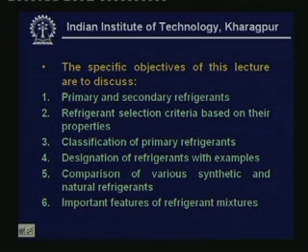Welcome back. In this lecture I shall discuss refrigerants. So, the specific objectives of this particular lecture are to discuss primary and secondary refrigerants, refrigerant selection criteria based on their properties, discuss classification of primary refrigerants, designation of refrigerants with examples, comparison of various synthetic and natural refrigerants, and finally some important features of refrigerant mixtures.

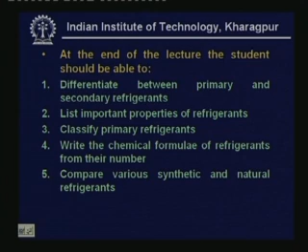At the end of the lecture you should be able to differentiate between primary and secondary refrigerants, list important properties of refrigerants, classify primary refrigerants, write the chemical formula of refrigerant from their number, compare various synthetic and natural refrigerants, and list salient features of refrigerant mixtures.

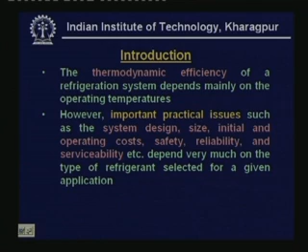So, let me give a brief introduction. We know that the thermodynamic efficiency of a refrigeration system depends mainly on the operating temperature, that means the heat source and sink temperatures. However, important practical issues such as the system design, size, initial and operating costs, safety, reliability and serviceability, etc. depend very much on the type of refrigerant selected for a given application. Hence, selection of a suitable refrigerant is a very important step in the design of any refrigeration system.

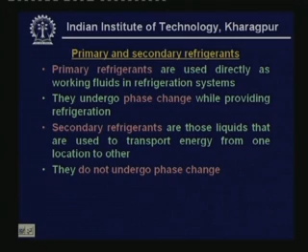Refrigerants can be broadly divided into primary and secondary refrigerants. Primary refrigerants are used directly as working fluids in refrigeration systems. They undergo phase change while providing refrigeration, that means while flowing through the evaporator vaporization takes place, and while flowing through the condenser these refrigerants condense. So they involve phase change processes, whereas secondary refrigerants are those liquids that are used to transport energy from one location to another. Unlike primary refrigerants, these secondary refrigerants do not undergo any phase change, and water and brines are the commonly used secondary refrigerants.

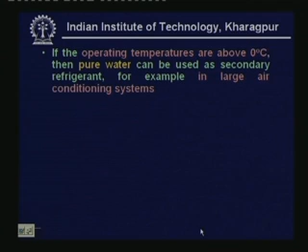If the operating temperatures are above 0 degree centigrade, then we can use pure water as secondary refrigerant. For example, pure water is widely used in large chilled water systems for air conditioning applications, etc. However, if the operating temperature is below 0 degree centigrade, that means for sub-zero temperatures, we cannot use water because water freezes at 0 degree centigrade. So, we have to use other secondary refrigerants, namely antifreezes or brines, and these kind of applications you encounter in cold storages or other frozen food processing applications, etc.

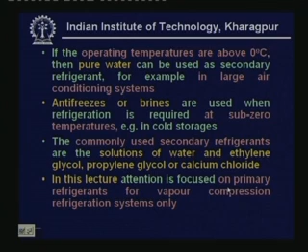The commonly used secondary refrigerants are the solutions of water and ethylene glycol, or the solution of water and propylene glycol, or the solution of water and salts such as calcium chloride, etc. In this lecture I shall not discuss secondary refrigerants, so the attention is primarily focused on primary refrigerants for vapor compression refrigeration systems only.

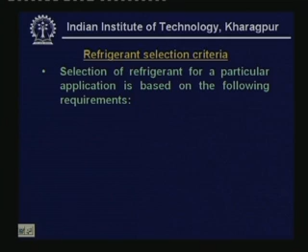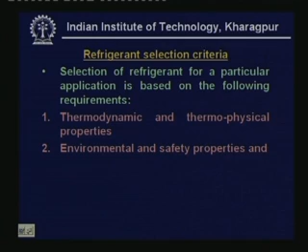Let us look at refrigerant selection criteria. Selection of refrigerant for a particular application is based on the following requirements. The first requirement is thermodynamic and thermophysical properties, second requirement is environmental and safety properties, and finally the third requirement is economics. So, first let us look at the first requirement, that is thermodynamic and thermophysical properties. The requirements are like this.

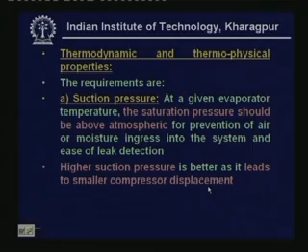First, the suction pressure. At a given evaporator temperature, the saturation pressure should be above atmospheric for prevention of air or moisture ingress into the system and ease of leak detection. This is an important requirement, and also a higher suction pressure is better as it leads to smaller compressor displacement. That means at a given evaporator temperature the refrigerant selected should have a positive pressure, that means the evaporator pressure should be above atmospheric. This is required because if any leakage takes place from the system to the surrounding, that means refrigerant leaks out from the system,

this is easier to handle than the reverse case, that means if the system is operating under vacuum, then air or moisture from outside leaks into the system. This is difficult to handle because in order to remove the air or moisture, you have to do a complete overhauling of the system. Also, if the system is operating under vacuum, then detection of leak is difficult. So as far as possible, the refrigerant should have a positive pressure at evaporator temperature.

Also, we know that when the suction pressure is high at a given temperature, then the density will be high or the specific volume will be low. That means for a given mass flow rate, the required size of the compressor will be small. For these reasons, the suction pressure should always be as high as possible. So this is the first requirement.

The second requirement, discharge pressure. At a given condenser temperature, the discharge pressure should be as small as possible to allow lightweight construction of compressor, condenser, etc. So, unlike suction pressure, at a given condenser temperature, discharge pressure should obviously be as low as possible. This is because once it is low, the maximum operating pressure of the system will be low, because that is decided by the condenser pressure.

Also, the pressure ratio will be small when the condenser pressure is small. So that is the third requirement. That means the pressure ratio, which is nothing but the ratio of the condenser pressure to the evaporator pressure, should be as small as possible for high volumetric efficiency and low power consumption. And the fourth requirement is that the latent heat of vaporization should be as large as possible, so that the required mass flow rate per unit cooling capacity will be small.

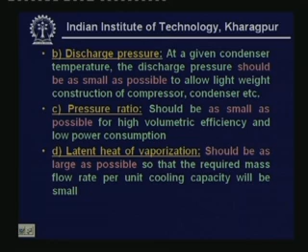However, we find that the above requirements are somewhat contradictory, because the operating pressures, temperatures and latent heat of vaporization are related by the Clausius-Clapeyron equation, and you know what the Clausius-Clapeyron equation is, given by this expression: ln P_sat = -h_fg/(RT) + s_fg/R, where h_fg is the latent heat of vaporization, s_fg is the entropy of vaporization, R is the gas constant and T is the absolute temperature.

Okay. So, using this equation, we find that the entropy of vaporization does not really change much. So, if you assume that it is constant, then you can show that the pressure ratio, that is the condenser pressure divided by the evaporator pressure, is equal to exp[(h_fg/R)(1/Te - 1/Tc)]. So, if the evaporator and condenser temperatures are fixed, let us say by the application and by the available heat sink, then you see that the pressure ratio increases as the latent heat of vaporization increases. That means, if you want a refrigerant with high latent heat of vaporization, the penalty you have to pay is a high compression ratio or high pressure ratio.

And high pressure ratio, as you know, leads to lower volumetric efficiency and lower volumetric capacity. On the other hand, if you want a very low pressure ratio, then the latent heat of vaporization will be low. That means the required mass flow rate for a given capacity of the refrigeration system will be high. That means you have to handle a large mass flow rate. This is again a disadvantage. This shows that a certain trade off is required between the pressure ratio and the latent heat of vaporization. In other words, a trade off is required between the COP and the volumetric capacity.

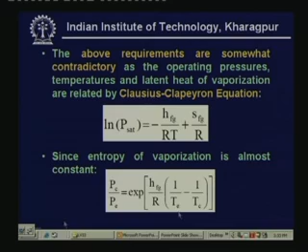Next comes the isentropic index of compression. The isentropic index of compression should be small, so that the compressor discharge temperature will be low. We know that the discharge temperature is linked to the isentropic index of compression by the formula, for example, T_discharge is given by T_suction times (Pc/Pe) raised to (gamma - 1)/gamma. This formula we have used while discussing compressors, etc. So, here gamma is the isentropic index of compression.

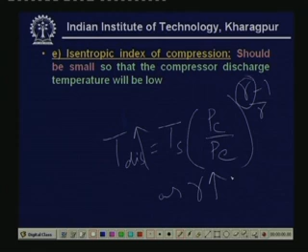So, you can see that for given compressor, condenser and evaporator pressures, and given suction temperature, the discharge temperature increases as your index of compression increases. So, this is not good from the compressor life point of view. So, in order to have a low discharge temperature, the value of gamma should be as small as possible.

So, the next requirement is that the liquid specific heat should be small, so the degree of subcooling will be large, leading to a smaller amount of flash gas at evaporator inlet. So, we need small liquid specific heat. Next, vapor specific heat. Vapor specific heat should be large, so that the degree of superheating will be small. We know that when the degree of superheating is large, the suction temperature will be high. Once the suction temperature is high, the density of the refrigerant at the entry to the compressor will be low. That means you require a larger compressor for a given mass flow rate. So this is not really good from a practical consideration.

So, as far as the vapor specific heat is concerned, we should have a high value of specific heat, but the liquid specific heat should be low. Again, we will find that this is contradictory. It is not possible to have a very high vapor specific heat and a low liquid specific heat. Next, liquid and vapor thermal conductivity. Both liquid and vapor thermal conductivity should be as high as possible for higher heat transfer coefficients.

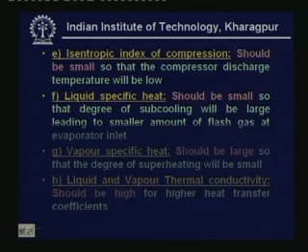Next requirement is liquid and vapor viscosity. The viscosity of both liquid and vapor should be as small as possible for smaller frictional pressure drops. So, we find that the thermodynamic properties are actually interrelated, and they are mainly dependent on the normal boiling point, critical temperature and the molecular structure. The normal boiling point indicates the useful temperature levels as it is directly related to the operating pressures. Okay, so, this is a very important property.

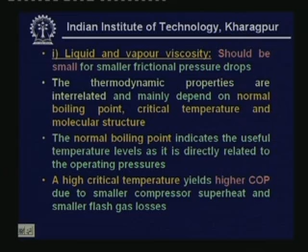Next comes critical temperature. So, what is the effect of critical temperature? If the critical temperature is very high, it yields higher COP due to smaller compressor superheat and smaller flash gas losses. Okay, so, this is the advantage of having high critical temperature. On the other hand, when the critical temperature is high, we find that the vapor pressure will be low. Once the vapor pressure is low, the volumetric capacity will be low. Okay, so, this is the disadvantage of having high critical temperature.

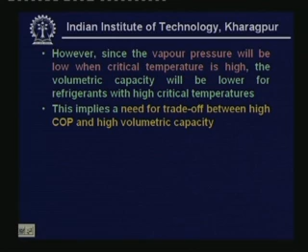So, you find that high critical temperature gives rise to higher COP, at the same time it gives rise to lower volumetric capacity. Okay. Again, you have to do a trade off between the volumetric capacity and the COP, and choose the critical temperature accordingly. This implies a need for a trade off between high COP and high volumetric capacity. And it is observed that for most of the refrigerants, the ratio of normal boiling point to critical temperature is in the range of 0.6 to 0.7. That means, this ratio is almost constant for most of the fluids.

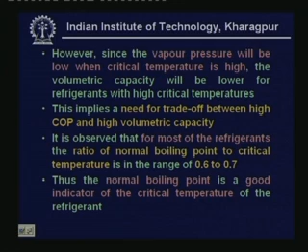Okay. This means that the normal boiling point is also a good indicator of the critical temperature of the refrigerant, and this ratio is in the temperatures are in Kelvin. Okay. Only then this ratio holds good. That means, you have to use absolute temperature scale. Okay. When you are using absolute temperature scale for the normal boiling point and critical temperature, you find that the ratio is about 0.6 to 0.7. Okay.

Now, properties such as latent heat of vaporization and specific heat depend on the molecular weight and structure of the molecule. And Trouton's rule shows that the latent heat of vaporization will be high for refrigerants having lower molecular weight. Okay. We have discussed Trouton's rule while discussing thermodynamics. Okay. So, according to Trouton's rule, if the molecular weight of the fluid is low, that means it gives rise to higher latent heat of vaporization. Okay. This is an advantage.

This is the reason why inorganic refrigerants, inorganic fluids such as water and ammonia, which have low molecular weight, always give rise to high latent heat of vaporization. On the other hand, synthetic refrigerants have high molecular weight, so their latent heat of vaporization is low. Okay. So, that is how the molecular weight and latent heat of vaporization are related. Now, the specific heat of refrigerant is related to the structure of the molecule, and a small value of vapor specific heat leads to dry compression, but higher degree of superheat.

Okay. That means, when you have a small specific heat for vapor, then you find that when you are starting the compression, if the inlet to the compression process is on the saturated line, then you find that the exit is always in the superheated region. That means compression will always be a dry compression process. Okay, so this is a requirement if you are talking about reciprocating compressors and many other compressors. Okay, so from this point of view, a low value of specific heat is good. Okay, but if the specific heat is low, we find that the degree of superheat will be high. Okay, this is not desirable.

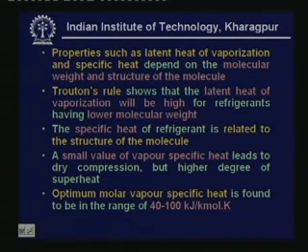Okay, so again you have to do some kind of a trade off, and again you find that there is an optimum value of vapor specific heat where the performance will be best. And it is also shown that the specific heat of vapor is related to the specific heat of the liquid. Okay, normally it is not possible to have, as I have already mentioned, a high value of specific heat for the vapor and a low value of specific heat for the liquid, or vice versa. Okay. And it is observed that the optimum molar vapor specific heat is found to be in the range of 40 to 100 kilojoule per kilomole Kelvin. Okay.

Next comes environmental and safety properties. Before I go to environmental and safety properties, there are also other thermodynamic properties which need to be considered. For example, one of the important properties, especially when we are dealing with very low temperature refrigeration, is the freezing point. Okay, the freezing point of the fluid should be lower than the lowest temperature that you encounter while operating the refrigerant system. Okay, this is required, otherwise the refrigerant may freeze while flowing through the system. Okay, so the freezing point should be as low as possible, right. Now let us look at the environmental and safety properties.

This is a major factor in deciding the usefulness of a particular refrigerant. Normally the efficiency of the system mainly depends upon the thermodynamic and thermophysical properties of the refrigerant, and we have discussed the requirements, right. But it is observed that finally whether the refrigerant can be used or not is decided not only by the thermodynamic and thermophysical properties, but mainly by the environmental and safety issues.

This is the reason why refrigerants such as carbon dioxide or ammonia or sulfur dioxide, which give reasonably good performance, were phased out or thought to be not good because they have certain safety related problems. Okay. So, especially the refrigerants used in the olden days, they were good as far as the performance is concerned, but most of them used to create some safety related problems. Okay, such as toxicity, etc.

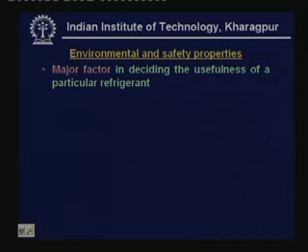That is the reason why they were phased out, and that is the reason why synthetic refrigerants were invented. Okay, so safety related properties are very, very important. Okay, now let us look at what are the environmental and safety related properties. These properties are, the first property is ozone depletion potential.

The ozone depletion potential, or the ODP, should be 0. Okay, and the ODP of a refrigerant or ODP of a fluid depends mainly on the number of chlorine or bromine atoms in the molecule. Okay, if the molecule contains chlorine or bromine atoms, then it will have a non-zero ODP value. Okay, and as per the Montreal Protocol, we have discussed this while discussing the history of refrigerants.

According to the Montreal Protocol, we cannot use any refrigerant which has non-zero ODP value. Okay, that means all ozone depleting substances have been phased out or have to be phased out. Okay, so in future the refrigerants should be non-ODS, that means non-ozone depleting substances. Okay. And the second important property is global warming potential or GWP. GWP should be as small as possible. That means refrigerants having high GWP are not recommended.

In fact, after the Montreal Protocol, several nations met at Kyoto, and under the Kyoto Protocol several refrigerants which have high GWP values have come under the substances to be regulated. Okay, because high global warming potential means you have the greenhouse effect, and we have discussed this issue also earlier. So, global warming is an environmental issue on a global scale. So, it is not recommended to use refrigerants having high GWP values. Okay. Even though there is no final decision as yet on the use of refrigerants having high GWP values, we really do not know, but in future they may be phased out.

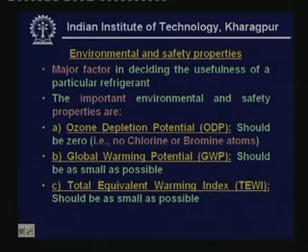Okay. Next is what is known as the total equivalent warming index, or TEWI. Okay, TEWI. This is a new index, and this index takes into account the direct as well as the indirect contributions of a refrigerant to global warming. Okay, so global warming potential considers only the direct contribution of a refrigerant to global warming. What is the direct contribution of refrigerant? When the refrigerant leaks out into the atmosphere, that means when you release the refrigerant into the atmosphere, what is its contribution to global warming? Okay, this is considered while estimating the global warming potential.

Okay, but the refrigerant can also contribute indirectly to global warming. And what is this indirect contribution? This indirect contribution depends upon its energy consumption. Okay, if a system using a particular refrigerant consumes a higher amount of energy compared to another refrigerant, then this particular refrigerant contributes to global warming indirectly, because higher energy consumption means higher burning of coal, etc. Okay, so this is the indirect contribution of a refrigerant. So these direct as well as indirect contributions of refrigerant have been taken into a single index, and this index is called the total equivalent warming index, TEWI. Obviously, the total equivalent warming index should be as small as possible for refrigerants. Okay.

Next comes the toxicity. Obviously, refrigerant should preferably be non-toxic. Toxicity means this is related to the hazardous nature of the refrigerant as far as human beings are concerned. Okay, if a refrigerant is toxic, then if a person is exposed to such refrigerant, he will be suffocated. Okay, so obviously refrigerant should not be toxic, right?

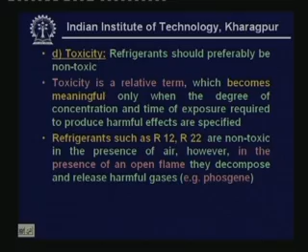However, in the presence of an open flame, they decompose and release harmful gases such as phosgene. This is again an important issue. So if you release R12 or R22 into the atmosphere, and there are no open flames or heating elements, then there is no problem, provided of course its concentration is not too high. But if there is an open flame, then the R12 decomposes in the presence of open flame and air, and it releases very dangerous, poisonous gases such as phosgene. If the human being is exposed to such conditions, then he will get affected drastically.

So ultimately the toxicity depends on many other issues: the concentration, the time of exposure and the conditions. And normally whether a particular refrigerant poses the problem of toxicity or not depends upon the amount of refrigerant that you are using in what space. If you are using a small amount of refrigerant in a large space, then even when all the refrigerant is released into the space, the concentration will be small, so it will not give rise to any serious problem. On the other hand, if you are releasing a large amount of refrigerant into a small volume or small space, then obviously the danger will be greater.

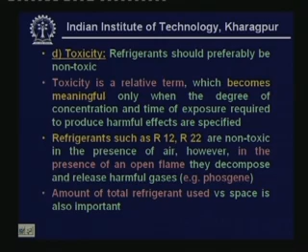So as I said, the amount of total refrigerant used versus space is also important. Next comes flammability. Obviously the refrigerant should preferably be non-flammable, and it should also be non-explosive. But we find that sometimes we cannot avoid using flammable refrigerants. In such cases special precautions should be taken to avoid accidents. That means the design has to be different if you are using a flammable refrigerant. You have to make sure that there are no ignition sources, and you also have to take higher precautions to prevent leakage of the refrigerant. Basically the way you handle a flammable refrigerant will be different from the way you handle a non-flammable refrigerant.

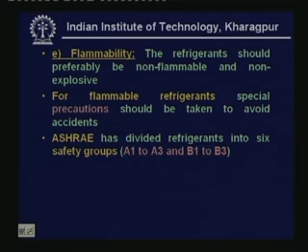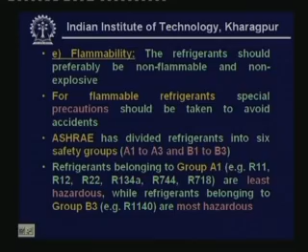And ASHRAE, the American Society of Heating, Refrigerating and Air Conditioning Engineers, has divided the refrigerants into 6 safety groups: A1, A2, A3 and B1, B2, B3. Refrigerants belonging to group A1, for example R11, R12, R22, R134a, R744, R718, are least hazardous, while refrigerants belonging to group B3, for example R1140, are most hazardous. So if you know to which group a particular refrigerant belongs, then you know whether it is really dangerous or hazardous or not. These are the advantages of knowing to which group a particular refrigerant belongs.

Other important properties are chemical stability. As far as possible, the refrigerant used should be chemically stable as long as it is within the system. Once it is released into the atmosphere, even if it breaks down, that is not a problem. In fact, in the aftermath of ozone layer depletion, it is observed that if it breaks down when released into the atmosphere, it is good, because the refrigerant will not go to the stratosphere. But as long as the refrigerant is within the system, it should not break down under any circumstances, even when it is exposed to higher temperatures, for example in the compressor. That means it should be chemically stable.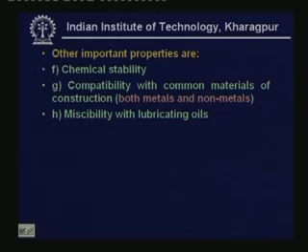The second requirement is compatibility with common materials of construction. The common materials of construction are both metals as well as non-metals. This is a very important practical requirement. The refrigerant that you use should be compatible with almost all materials of construction, such as materials used for constructing the heat exchangers, various seals used in the system, various plastics used in the system, etc. It should not react with any of these materials. And next, miscibility with lubricating oils. Miscibility with lubricating oils is a very complex issue, because it is not necessary that the refrigerant should be completely miscible with a lubricating oil.

Okay, if a refrigerant is not at all miscible with lubricating oil, for example ammonia is not at all miscible with lubricating oil, then all that we have to do is install an oil separator at the exit of the compressor, so that you can collect the oil from the refrigerant vapor and send it back to the compressor. Okay, so that the oil does not circulate through the system, right.

On the other hand, if you have a refrigerant such as R12, which is completely miscible with the oil, then also there is no problem, because since oil is miscible with the refrigerant, oil will circulate along with the refrigerant, and if you take care of the design of the evaporator tubes, etc., then oil will come back to the compressor. Okay, so in principle there is no problem with refrigerants which are completely miscible and which are not completely miscible. Okay, but the problem comes with refrigerants which are partly miscible.

Okay, with partly miscible refrigerants such as R22, you have to take extra care to make sure that the lubricating oil is coming back to the compressor. Okay, so you must know the relationship between the lubricating oil and the refrigerant. Okay, so this has a bearing on the design of the system.

Then dielectric strength. Dielectric strength is very important in systems using hermetic compressors. We know that in hermetic compressors, the refrigerant comes in contact with the electrical winding of the motor. Okay, so the dielectric strength of the refrigerant should be high, so that it will not break down. Okay, this is not very important when you are talking about open type of compressors.

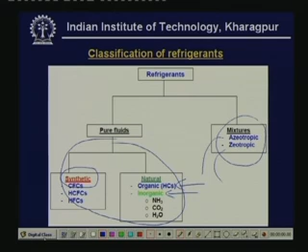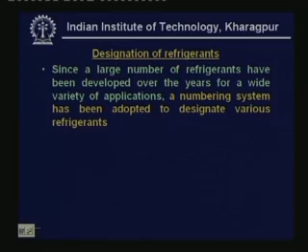Now, let us look at designation of refrigerants. Since a large number of refrigerants have been developed over the years for a wide variety of applications, a numbering system has been adopted to designate various refrigerants. There are in fact hundreds of refrigerants which are used in a wide variety of applications. So, it is very difficult to identify or designate them by their chemical composition. As a result, people have devised a numbering system.

So, if you know the number of the refrigerant, then you can get some very useful information regarding the refrigerant. From the number one can get information about the type of refrigerant, its chemical composition, molecular weight, etc. All the refrigerants are designated by R followed by a unique number.

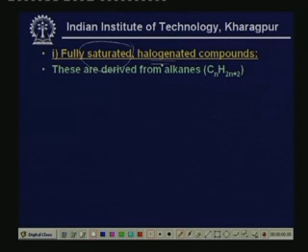So, first let us look at fully saturated halogenated compounds. These are derived from alkanes. The alkanes, as you know, have general formula CnH2n+2, and examples of alkanes are methane, ethane, propane, etc. What do we mean by halogenated? Here the hydrogen atoms are partly or fully replaced by other atoms, for example, atoms of chlorine, fluorine, bromine, etc. And always, the total number of atoms in the molecule will be equal to 2n+2. So, these are fully saturated halogenated compounds.

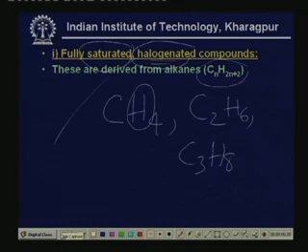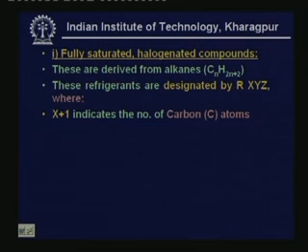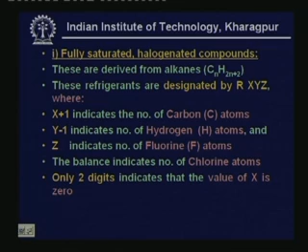These refrigerants are designated by R, X, Y, Z, where X, Y, Z are numbers. X plus 1 indicates the number of carbon atoms, Y minus 1 indicates the number of hydrogen atoms, and Z indicates the number of fluorine atoms, and the balance indicates the number of chlorine atoms. If there are only 2 digits, that means the value of X is 0. If you have only R12, that means X is equal to 0. Let me give an example.

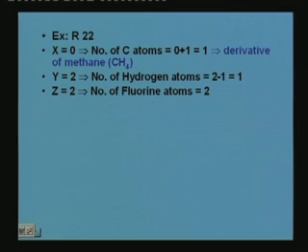Let us say that the number is R22. There are only 2 numbers, that means X is equal to 0. X is 0 means the number of carbon atoms is 0 plus 1, that is equal to 1. Number of carbon atoms is 1 means this refrigerant is a derivative of methane, CH4. Next, Y is equal to 2, that means number of hydrogen atoms is 2 minus 1, that is 1. Next, Z is equal to 2. Since there are only 2 numbers, this is R022, and the 0 is omitted, so we simply show it as R22. So, X is 0, Y is 2 and Z is 2.

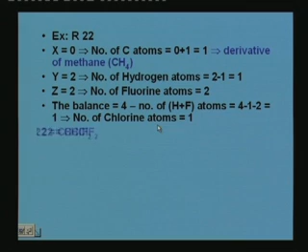From the general formula, Y is 2 means number of hydrogen atoms is 2 minus 1, that is 1, and Z is 2 means number of fluorine atoms is equal to 2. And the balance, what is the balance? There should be 4 bonds in total, so the balance is 4 minus the number of hydrogen atoms plus fluorine atoms. Here the number of hydrogen atoms is 1 and fluorine atoms is 2, so the balance is 4 minus 1 minus 2, that is 1. So, the number of chlorine atoms is 1. That means R22 has 1 carbon atom, 1 hydrogen atom, 2 fluorine atoms and 1 chlorine atom. Its chemical formula is CHClF2. Once you know the basic rule, just by looking at the number you can get its chemical composition. This is the advantage of devising this kind of number system.

Using the same rule you can show that the formula of, for example, R12 is CCl2F2, that means it is a chlorofluorocarbon, and the chemical composition of R134A is C2H2F4. This is the derivative of ethane because you have two atoms of carbon. In R134A, the letter A stands for an isomer. That means you can have a refrigerant R134 and a refrigerant R134A. Both have the same chemical composition, but different atomic arrangement. So, the molecular weight and chemical composition will be the same, but the atomic arrangement will be different, and such molecules are called isomers. Because of the different molecular arrangement they give slightly different properties.

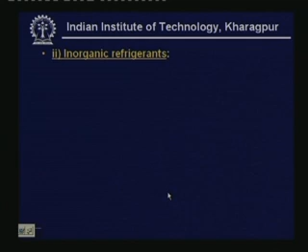Next comes your inorganic refrigerants. These are designated by number 7 followed by the molecular weight of the refrigerant. The molecular weight is rounded off. For example, ammonia has a molecular weight of 17, so its number is R717. The 7 shows that it is an inorganic refrigerant.

Similarly, carbon dioxide, CO2, its molecular weight is 44, so its number is R744. Water, molecular weight is 18, so its number is R718. So, that means the last 2 digits show its molecular weight. Air has a molecular weight of 29, so its number is R729. Similarly, sulfur dioxide, for example, its molecular weight is 64, so its number is R764.

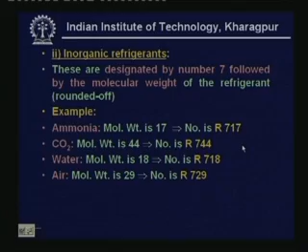Next, the third category is mixtures. All azeotropic mixtures come under the 500 series, that means R500, R501, R502, etc. So, the 5 or 500 series means that it is a mixture and it is an azeotropic mixture. All zeotropic mixtures have been given the 400 series. That means R404, 407, 410, etc.

Let me give an example, azeotropic mixture R500. This is a mixture of R12 and R152A. Of course, looking at the number 500, you cannot say it is a mixture of what, but all that you can say is that it is an azeotropic mixture because it starts with 5. You cannot say its composition or its weight percent or anything. Similarly, R502 is a mixture of R22 and R115. Here this is weight percent. For example, in R502, R22 has 48.8% by weight, R115 is 51.2% by weight.

Next comes zeotropic mixtures, for example R404A. Again the digit 4, that means the 400 series, means that it is a zeotropic mixture. It is a mixture of R125, R143A and R134A. Here the letter A, the capital letter A, does not mean that it is an isomer. So, to distinguish between isomers and the others, small letters a, b, etc. indicate isomers, whereas capital letter A means it is a mixture. Then again you can have R407A, it is a mixture of R32, R125 and R134A.

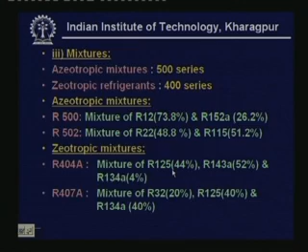So, the last category is hydrocarbons. Saturated hydrocarbons, for example propane. Propane, as you know, has the chemical formula C3H8. So, you can apply the same rule that we have applied for fully halogenated hydrocarbons, and you can show that its number is R290. Because here the number of carbon atoms is 3. So, you have this 2 here because X is 2, right.

X is 2 means the number of carbon atoms is 2 plus 1, that is 3. And Y is 9 here, that means the number of hydrogen atoms is 9 minus 1, that is 8. Here Z is 0, that means it does not contain any fluorine atoms. So, since it is balanced, you do not have any chlorine atoms also. So, propane follows the rule given earlier, but

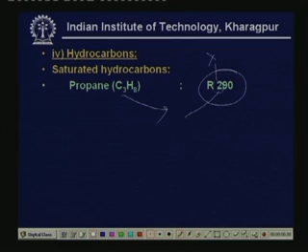the problem comes when you have to give a number for n-butane, for example. N-butane has the chemical formula C4H10. So, you cannot apply the earlier rule, because if you apply it, you find that the number of hydrogen atoms is 10. So, the Y value will be 11. Y value 11 means it has 2 digits. So, that leads to confusion. So, as a result, n-butane has been given an arbitrary number, that is R600.

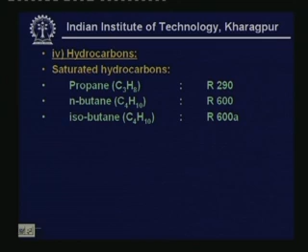Similarly, you have isobutane. Isobutane is also an isomer of butane, and its chemical composition is the same as n-butane, that is, it is C4H10, and it is given the number R600A. Again here the letter A means that it is an isomer.

You can also have unsaturated hydrocarbons, for example R1150. Here it is 4 digits, unlike the other refrigerants. 4 digits indicates that it is an unsaturated hydrocarbon. So, the first digit 1 means that it is an unsaturated hydrocarbon, and for the other digits you can again apply the rule and get the chemical composition. For example, the second digit 1 means that the number of carbon atoms is 2, the third digit 5 means that the number of hydrogen atoms is 4. The fourth digit 0 means that the number of fluorine atoms is 0. Similarly, R1270. This is C3H6, that is, it is propylene.

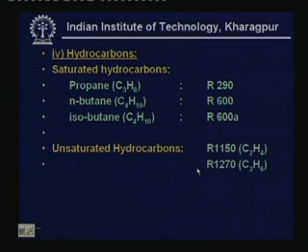So, that is how the numbering system is being used. You have to keep this in mind, so that once you know the number, you can immediately identify the refrigerant. Whenever we talk about refrigerants, normally we designate them in terms of numbers only, because the chemical formulas or chemical names are very long, and always mentioning them in terms of chemical names can be confusing. Next, let us look at the comparison between different refrigerants.

Synthetic refrigerants that were commonly used for refrigeration, cold storage and air conditioning applications are R11, a CFC, chlorofluorocarbon 11; R12, that means CFC12; R22, an HCFC, hydrochlorofluorocarbon 22; and R502, an azeotropic mixture of HCFC22 and CFC115. I am sorry, there is a mistake earlier; R502 is a mixture of HCFC22 and CFC115. These were used very widely, but had to be phased out due to their ozone depleting potential. That means all these refrigerants have non-zero ODP values. So, due to the Montreal protocol, all these refrigerants were already phased out or have to be phased out.

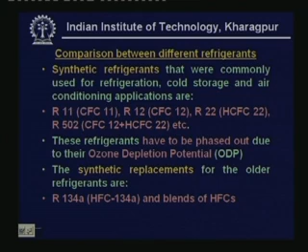The synthetic replacements for the older refrigerants include R134a. This is an HFC, a hydrofluorocarbon, and it does not contain chlorine. So, its ODP value is 0, so it can be used. This is one of the synthetic replacements for the older refrigerants. In addition to that, various blends of hydrofluorocarbons are also being used as synthetic replacements. Generally, synthetic refrigerants are non-toxic, non-flammable and are compatible with various materials of construction. So, these are the main advantages of synthetic refrigerants.

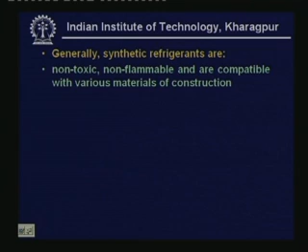However, compared to the natural refrigerants, these synthetic refrigerants offer lower performance and they also have higher global warming potential. Normally, you find that their COP values are much lower than the natural refrigerants, which means efficiencies are lower. Also, the thermophysical properties are not as good as those of natural refrigerants, and in addition they possess high global warming potential. As a result, all the synthetic refrigerants face an uncertain future. Even though right now there is no ban on them, we really do not know. In future they may be banned or phased out.

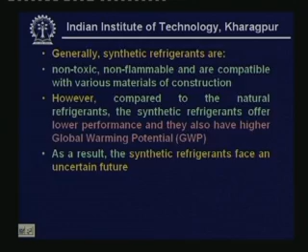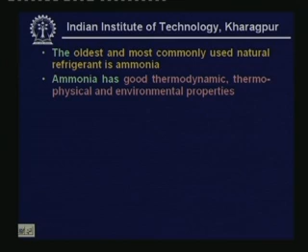The oldest and most commonly used natural refrigerant is ammonia. It is more than 100 years old and it is still being used very widely. Ammonia has excellent thermodynamic, thermophysical and environmental properties. It is inexpensive and easily available. However, it is toxic and it is not compatible with some of the common materials of construction such as copper or brass. So, these are the disadvantages of ammonia: toxicity and incompatibility with common materials. It can also be flammable under certain conditions.

Other natural refrigerants that are being suggested are hydrocarbons and carbon dioxide. Hydrocarbons and carbon dioxide were used in the olden days. If you remember our lecture on the history of refrigerants, these were very widely used in the early days of refrigeration. But later they were phased out because of some perceived problems such as flammability and low critical temperature. But they have made a strong comeback because of their excellent thermodynamic and thermophysical properties and mainly because of their environmental friendliness. So, in spite of some practical problems, these refrigerants are being considered as they are environmentally safe, inexpensive and offer good performance.

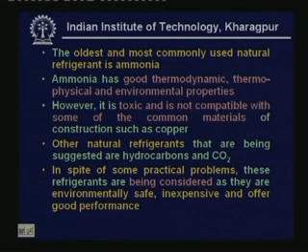Now, let me show some commonly used refrigerants and their salient features and properties. First refrigerant is R11. R11 is a chlorofluorocarbon, so it is a CFC. It has a normal boiling point of 23.7 degrees centigrade. Since its normal boiling point is quite high, its operating pressures will be low. That means, if you want to use it for air conditioning applications, say at 7 degrees evaporator temperature, the evaporator will be operating under vacuum condition, that means the pressure will be subatmospheric. So, this is a disadvantage of R11.

And the specific volume of the refrigerant will be very high because the pressures are low. So, these are two disadvantages of this particular refrigerant. However, since it has other advantages, this is still used and it is mainly used along with centrifugal compressors, because of its high specific volume. Its latent heat of vaporization at normal boiling point is 182.5 kilojoule per kg. Its critical temperature is almost 198 degrees centigrade, which is good, and its isentropic index of compression is 1.13. And its ODP is 1 and its GWP is 3500.

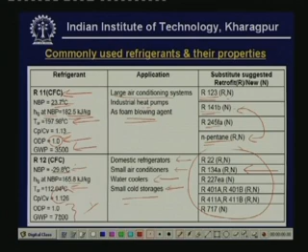Next is R22. This is a hydrochlorofluorocarbon. This is another very widely used refrigerant, and it has a normal boiling point of minus 40.8 degree centigrade, and it also has a reasonably high latent heat of vaporization of 233.2 kilojoule per kg, but it has a lower critical temperature of 96 degree centigrade compared to R12, and its Cp by Cv value is also relatively higher. So that means its discharge temperatures will be high, and its ODP value is non-zero, but it is quite low. Okay, so it has an ODP value of 0.05.

So it is also a substance which has to be phased out, but unlike R12 and R11, some time is allowed for phasing out. Okay, so you can use it till almost 2030. Okay, so you can still use it. It also has a global warming potential, and it is mainly used in air conditioning systems and cold storages. Okay. And since it also has got to be phased out, some substitutes have to be found. Okay. Again, these are the major substitutes.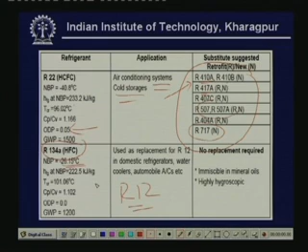This is a hydrofluorocarbon. Its properties are almost closest to R12. Okay. It has a normal boiling point of minus 26.15 degree centigrade. Its latent heat of vaporization is good. Critical temperature, etc., are also shown here, and it is used mainly as a replacement for R12 in domestic refrigerators, water coolers, automobile air conditioning systems, etc. Okay. No replacement is required as yet because its ODP value is 0. Okay. There are some problems with this. The problems are it is immiscible with mineral oils, so you cannot use mineral oils as lubricants, so you have to go for synthetic lubricating oils, and it is also highly hygroscopic.

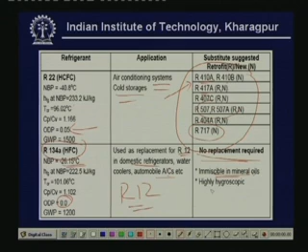Next comes refrigerant ammonia R717, and its normal boiling point is almost minus 33 degree centigrade. It has a very high latent heat of vaporization at normal boiling point because of its low molecular weight. Okay. Its critical temperature is also quite high. Its Cp by Cv value is high, which is a disadvantage. So you have to use water cooled compressors to keep the compressor temperature low. Okay. It is excellent as far as its environment friendliness is concerned because its ODP is 0, GWP is also 0. So its major applications are in cold storages, ice plants, in food processing, and in frozen food cabinets, etc. Okay. You do not require any replacements for this. Some problems are it is toxic and flammable, and it is incompatible with copper and brass. Advantages are it is highly efficient and it is inexpensive and widely available.

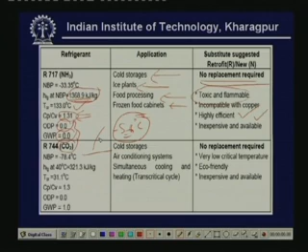Next comes R744, this is carbon dioxide. It has a very low normal boiling point of minus 78.4 degree centigrade, but still its freezing point is about minus 56 degree centigrade. So you cannot use it for temperatures below minus 56 degree centigrade because of its freezing point. Okay. And it also has good latent heat of vaporization.

Major problem with this is its critical temperature is very low. That is the reason why it was phased out, but alternate cycles have been devised, that is the transcritical cycle, where the condensation process is replaced by a gas cooling process, and this has made a strong comeback because of the modification in the cycle.

Other important properties: it has a low ODP, it has zero ODP, I am sorry, and it has very low GWP. Its major applications are in cold storages, in air conditioning systems, and in simultaneous cooling and heating if you are using a transcritical cycle. You do not require any replacement, and the major disadvantage is low critical temperature and high operating pressures. I did not mention this, but its operating pressures are very high, and it is eco-friendly, inexpensive and easily available.

Next is water, that is R718. Major problem with water is its high normal boiling point of 100 degree centigrade. That means your operating pressures will be under high vacuum. Since it has a low molecular weight, its latent heat of vaporization is very high. It's excellent from this angle. Its critical temperature is also very high. It's very good. The problem, of course, is the Cp by Cv value is high.

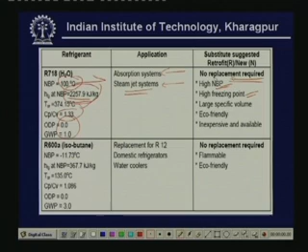It is perfectly environmentally friendly because its ODP is 0 and GWP is very low, and its major applications are as refrigerant in absorption systems and as refrigerant in steam jet systems. Its features are you do not require any replacement because of its excellent environmental properties. Disadvantages are high normal boiling point and high freezing point, so you cannot use it for sub-zero temperatures. Large specific volume, so you cannot use reciprocating compressors because of this. Large specific volume is because you are operating the system at very low pressures. So, its main advantages are eco-friendliness, inexpensive, and availability.

Next is R600A, this is isobutane, a hydrocarbon. Its normal boiling point is minus 11.73 degree centigrade, its latent heat of vaporization is reasonably high, its critical temperature is very high, and the Cp by Cv value is low, which is good. Its ODP is 0, so it is perfectly safe as far as ozone layer depletion is concerned. GWP is also very low.

This is used as a replacement for R12 in new systems. You have to change the compressor in domestic refrigerators, water coolers, etc. Its features are you do not require any replacements. Its main concern is that it is highly flammable, and its main advantage is that it is eco-friendly.

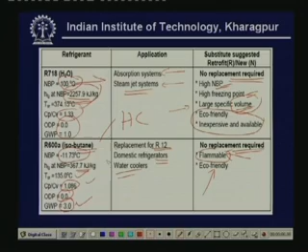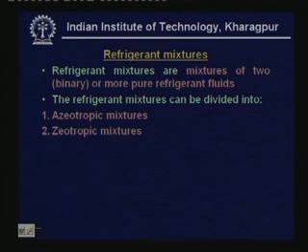So, this table is not actually comprehensive because there are many other refrigerants with many other features and many other problems also. Now, let us briefly look at refrigerant mixtures. Refrigerant mixtures are mixtures of 2 or more pure refrigerant fluids. The refrigerant mixtures can be divided into, as I said, azeotropic mixtures and zeotropic mixtures. The azeotropic mixtures are usually binary mixtures that behave like a pure fluid. For all practical purposes they behave like a pure fluid. The example is R502, which is a mixture of R22 and R115.

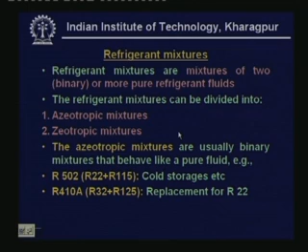This was mainly used in cold storages, etc., but this is banned because of R115, which is an ozone depleting substance. Then you also have R410A. This is R32 plus R125. Even though I am calling it an azeotropic mixture, its number is in the 400 series. This is what is known as a near azeotropic mixture. That means its temperature variation during phase change is very small. It is a replacement for R22.

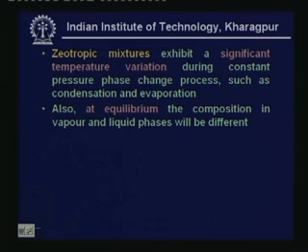Zeotropic mixtures exhibit a significant temperature variation during constant pressure phase change process. That means when evaporation or condensation is taking place at a constant pressure, temperature does not remain constant. For pure fluids, temperature remains constant, that means the process is isothermal, whereas for zeotropic mixtures, temperature of the refrigerant varies during phase change. So, this is a major difference. Also at equilibrium, the composition in vapor and liquid phases will be different. So, these are the differences between zeotropic and azeotropic mixtures.

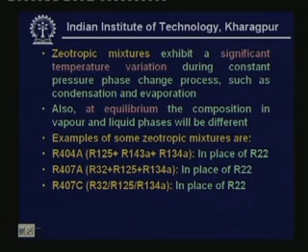Examples of some zeotropic mixtures are R404A, which is a mixture of R125, R143a and R134a. This is mainly used in place of R22. Then you also have R407A, this is a mixture of 32, 125 and 134a. This is also used in place of R22. Then you also have R407C, which is used in place of R22. Then mixtures offer the advantages of tailoring the composition to suit various temperature requirements. This is a major advantage of mixtures. It is also possible to control the properties such as toxicity, flammability, oil miscibility by manipulating the composition. Hence, they are finding greater use.

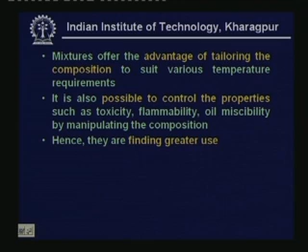However, since the composition of zeotropic mixtures changes due to leakage, this is a major problem. Use of these substances requires greater care. And design of equipment such as evaporators and condensers is also complex because of the temperature variation during evaporation, condensation, etc.